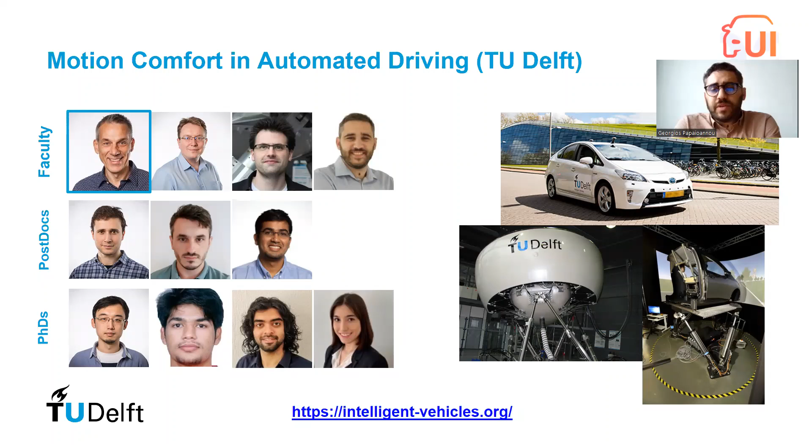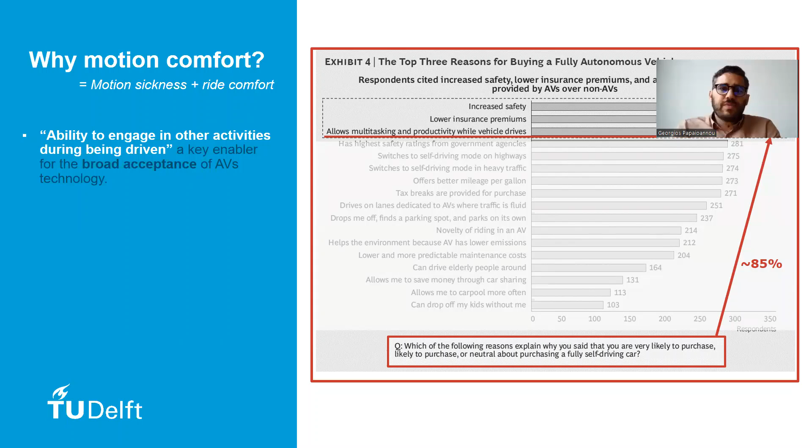But the main question that arises for all of us is why motion comfort is so important. And this is the motivation why we conduct this research and why we have built this workshop. Motion comfort, the ability to engage in other activities while being driven, is one of the main enablers for the automated vehicle technology. At the same time, all the characteristics of the envisaged AV designs, like handing over the vehicle control, sitting backwards, the blocked view, and the eyes off the road, are expected to provoke motion sickness and discomfort to the occupants.

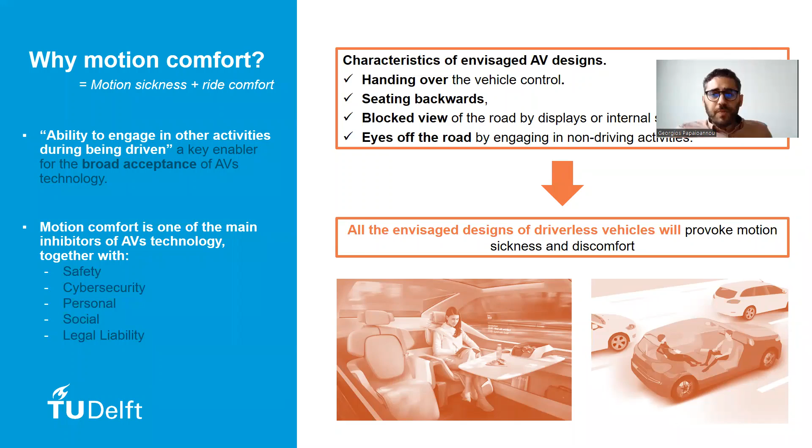And this makes motion comfort one of the main inhibitors of AV technology, together with safety, cybersecurity, and other factors. So, it is not only crucial to enhance it, where my research has been focusing so far, but at the same time unravel it, model it, and predict it in order to secure the AVs' potential for safety, environmental, and accessibility impact. So, let's see what I have been doing so far in these two directions and what I plan to do.

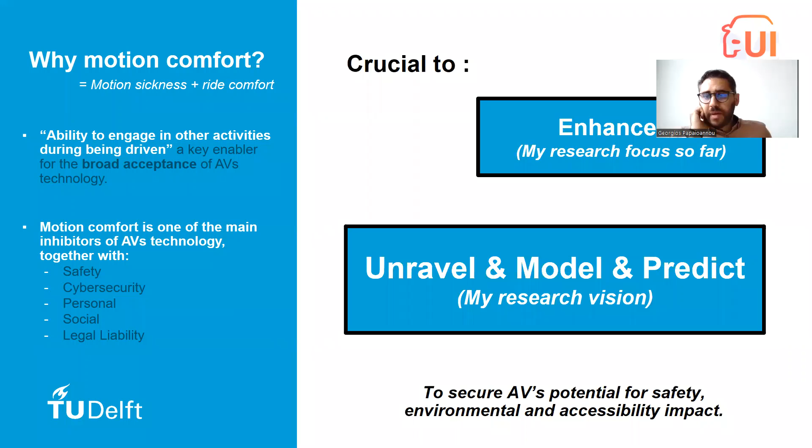However, unfortunately, the existing models that we have in the literature fail to capture all these essential factors. We have models that consider mainly the vestibular system, and there are few efforts, which are unvalidated, that focus also on the visual conflicts. At the same time, we have models that don't consider anything about postural stability and human posture in general, and they are not individualized, meaning that they are focused on the group rather than the individual. So there is the need to reconsider the current models and design more accurate ones in order for us to be able to successfully build comfortable automated vehicles.

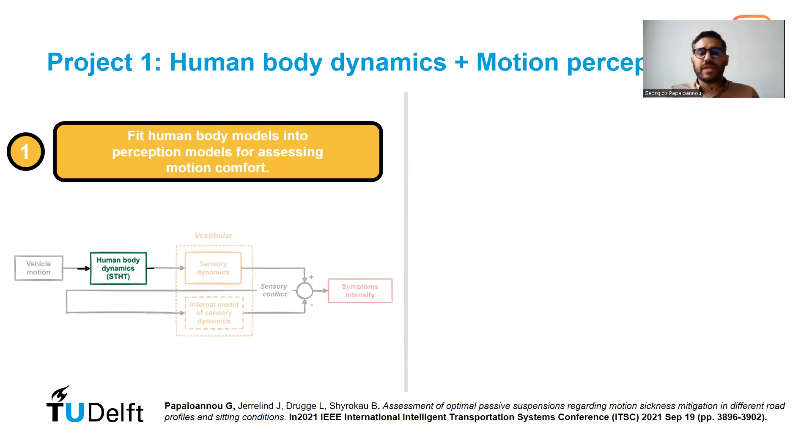So, in this direction, one of the works that I have conducted in the past focused on two things. First, to fit human body models into the perception models for assessing motion comfort more accurately. And secondly, to investigate using simulations how the translational and rotational accelerations changed compared to the motion sickness incidence. And we wanted to investigate this relation with different chassis designs, different seating conditions, and also different road profiles.

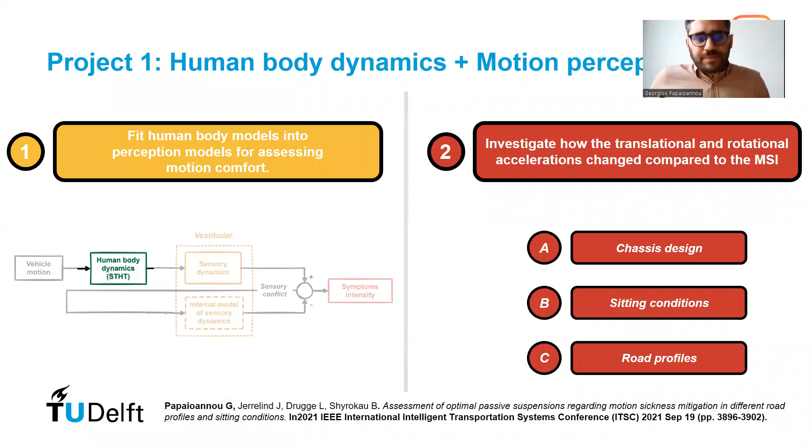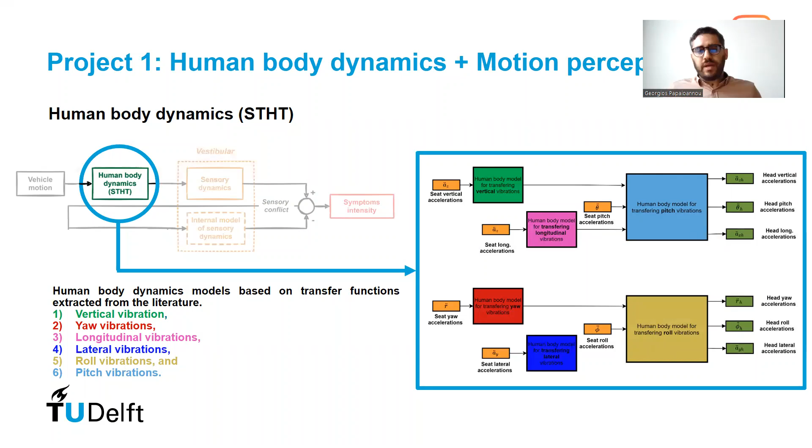So, in order to do that, we built six-dimensional human body models based on experimental data that were transferring the seat vertical, yaw, longitudinal, lateral, roll, and pitch accelerations to the occupant's head. In some cases, we were also considering the effect of the seat rotational accelerations on the translational accelerations. For example, when we were calculating the transmissibility of the seat pitch acceleration to the head, we were also calculating the effect of the seat pitch acceleration on the longitudinal acceleration. So, after having built this human body model, we used the outputs of the human body model as inputs to the perception model in order to assess motion sickness.

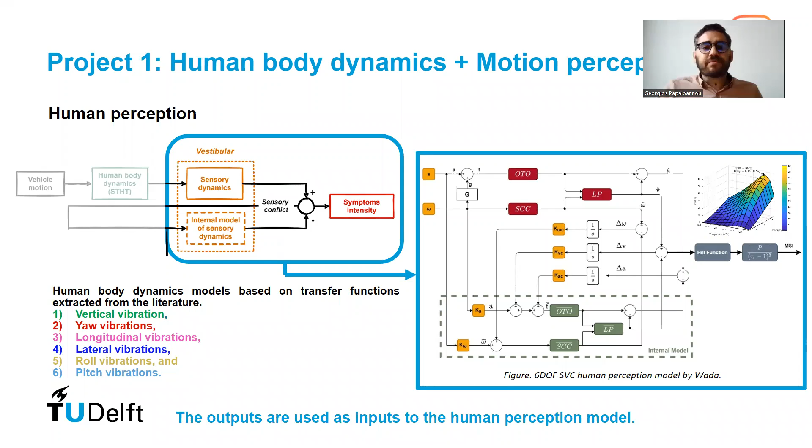And in this paper, we used the 6 degree of freedom subjective vertical conflict model built by Kamiji and Wada. And then using this model, we assessed the optimal passive suspensions regarding motion sickness mitigation, and we extracted some important conclusions. One of these was that the seat-to-head transmissibility is a crucial part of assessing motion comfort,

that head rotation matters when it comes to suspension design, different road profiles and sitting conditions didn't affect the importance of head rotation, and that the ISO metric couldn't accommodate motion sickness reduction in suspension design, and we need to include pitch rotations as well in the optimization systems.

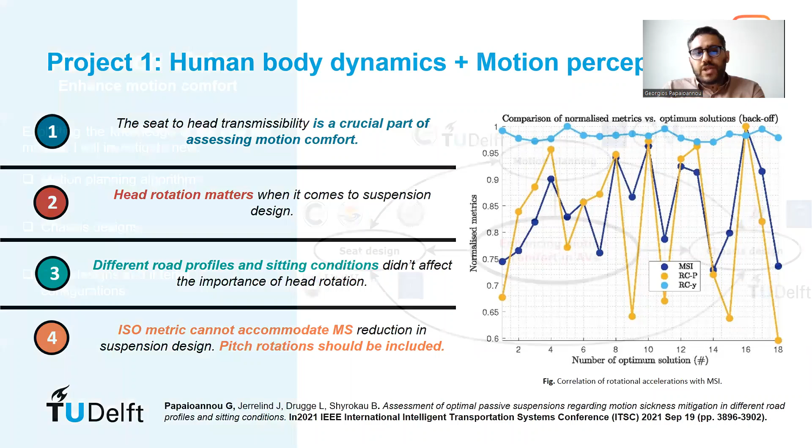So, regarding the second part of my research vision, the enhancement of motion comfort, exploiting the knowledge of new motion sickness models and new conclusions regarding its impact and its relation with vehicle dynamics, I will investigate new motion planning algorithms, chassis design, and seat designs and interior configurations. This is something I have been already doing in my research so far, with important collaborations with different universities and industrial partners.

So, regarding the first part, the motion planning, as a postdoc at Cranfield University, I was supervising a PhD student, and we published one paper about the fundamentals of motion planning for mitigating motion sickness from the optimal control perspective. Based on this work, at KTH, my previous affiliation, together with an industrial PhD from Volvo, we extended this work by incorporating in the control modules the 3D human body model that I mentioned before.

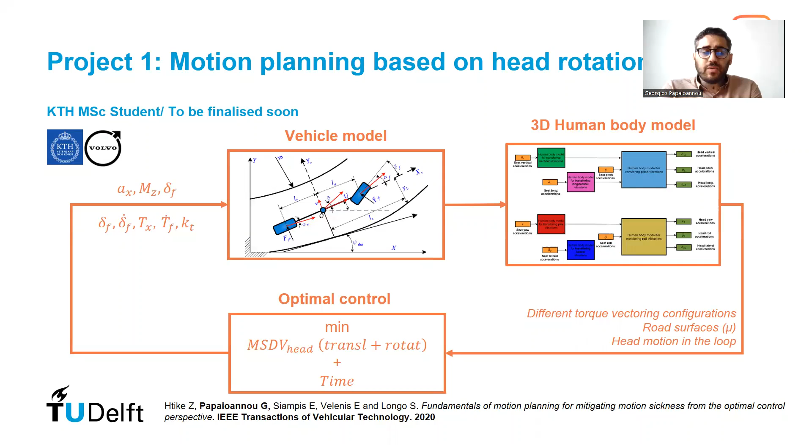At the same time, using this model, we built different torque vectors. We investigated how different torque vectoring configurations affect motion comfort, how the different road surfaces affect it, and also how the head motion in the loop improves or not the performance. This project is a master project, as I said, and it's going to be finalized soon, and hopefully results will be published.

The next part of my research was about novel seat designs. The AVs are going to experience a complete interior redesign because we want the interior to be transformed closer to a living room or an office in order to accommodate the engagement in non-driving activities and increase the occupant's productivity. And this will allow us the inclusion of seats which employ active suspensions in order to further improve motion comfort.

In this direction, last year I built 2 seat suspensions, one focusing on the vertical isolation, called active K-seat, and another one, an integrated active suspension that is isolating at the same time both the vertical and the longitudinal vibrations, leading to much more motion comfort.

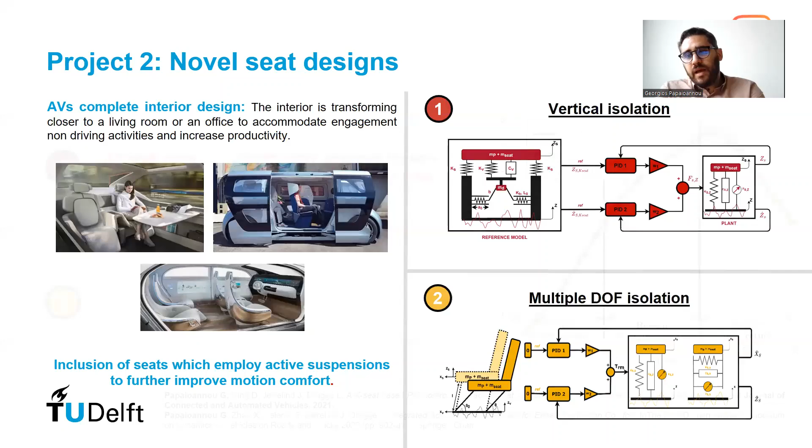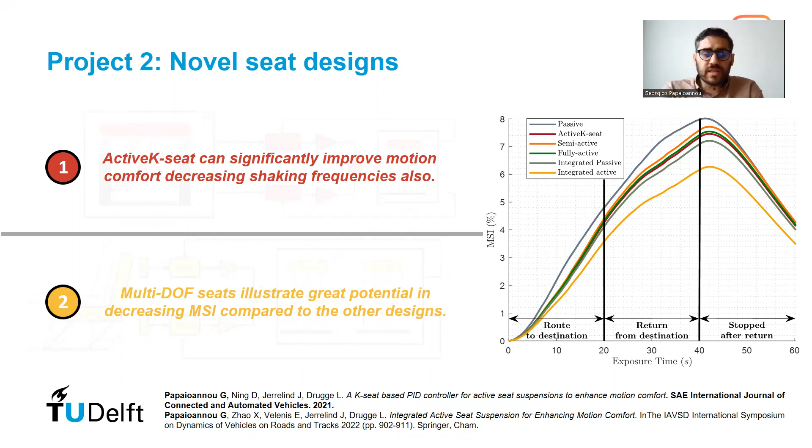The conclusion that we extract from this literature is that the active K-seat, the first one that is focusing on the vertical isolation, can significantly improve motion comfort, decreasing the shaking frequencies also, and the main advantage of this model was and is its ability to isolate the low frequency vibrations that are of interest for motion sickness. And secondly, the multi-degree of freedom seats illustrated a great potential in decreasing motion sickness, which is very promising, and I plan to focus on this further in order to see the ability of such type of suspensions in motion sickness mitigation.

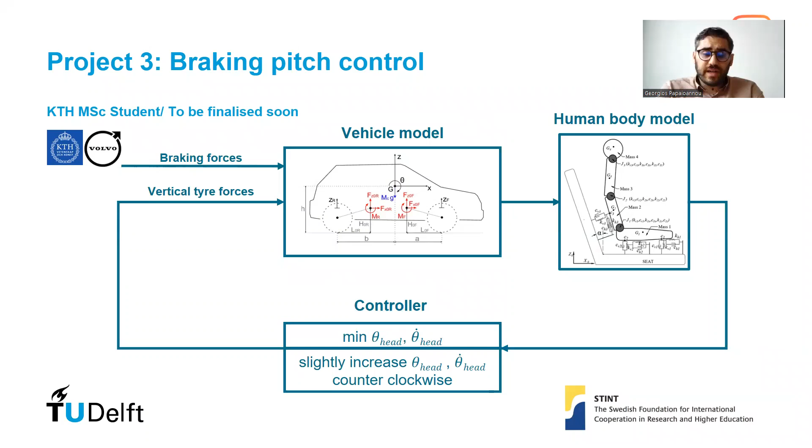And at the same time, we consider two alternatives, either for the vehicles to flat brake or for the vehicles to slightly increase their pitch counterclockwise. And the results so far are promising, but this project, as I said, was initiated at my previous affiliation at KTH in collaboration with an industrial PhD from Volvo. And hopefully we will have the final results soon to publish them.